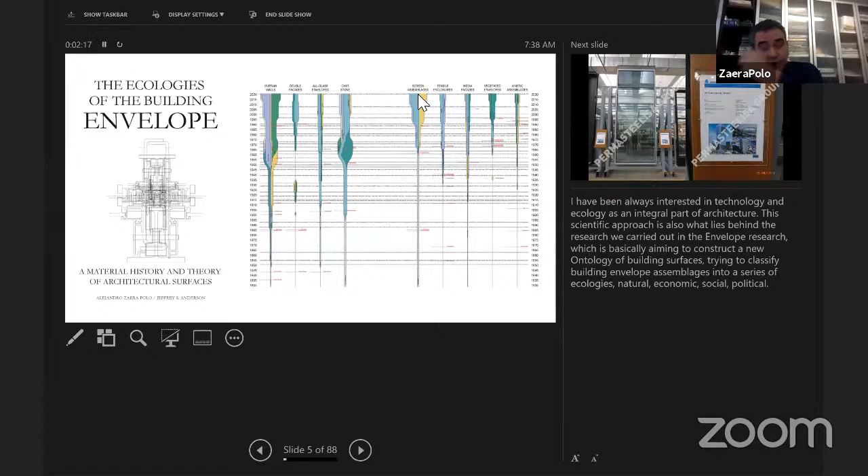My engagement with technologies runs also deep, related to one of the moments Carlo cited, the Venice Biennale in 2014, the origin of a project on the envelope, about to be published by Actar. The core of the project was the realization that the elements, the technologies in buildings, are much more interesting than the buildings themselves. We suspected, it was a kind of epiphany, that the issues dealt with at the scale of the detail of the technology are much more significant than the issues we normally deal with when practicing architecture.

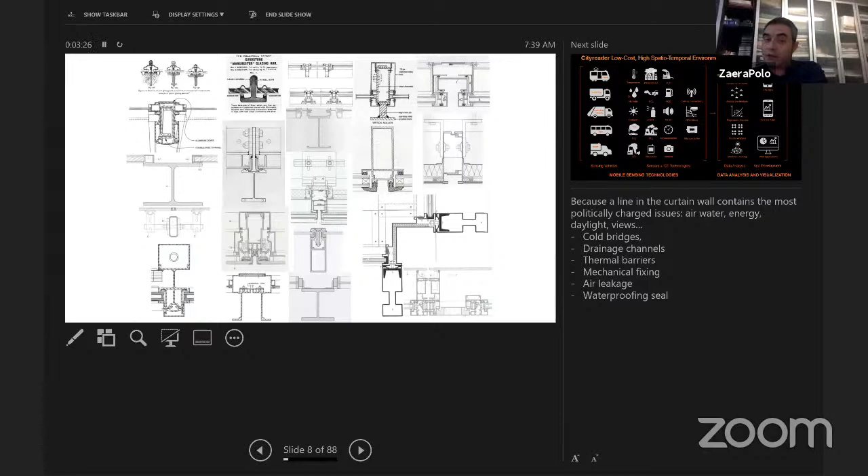This is the way we used to draw facades. Mullions are double lines running down a facade that explain a certain composition, rhythm, language, etc. But actually, within these two lines, there is a whole world of cold bridges, drainage channels, thermal barriers, mechanical fixings, air leakage, and waterproofing seals, dealing with the most politically charged issues: air, water, energy, and biomass, which is maybe the technology we are going to be dealing with. Urban environments are politicizing those natural elements, dealt with by these assemblages of materials that compose architecture. So it was a focus on these hidden technologies of architecture.

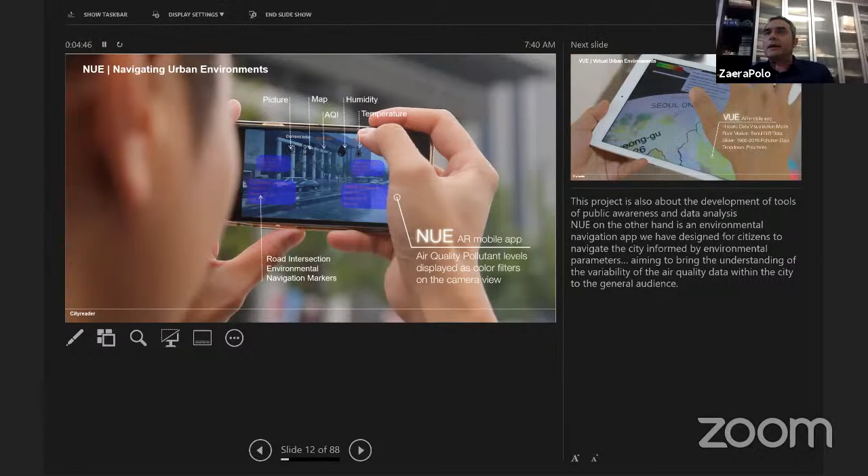This interest in technology and science has been substantially enhanced by my partner, Maider Llaguno, who is an architect but also a scientist specializing in urban environments, and has been crucial in radicalizing our practice toward a technological edge. One of the things she has been doing is developing mobile sensing technologies to acquire urban microclimate data at high spatiotemporal resolution through kits mounted on vehicles, producing images of the urban environment. We are also starting to deal with how, through AR devices, to make that data available to a wider public.

Some of these were displayed or tested for the first time at the Seoul Biennale in 2017. But let me go to the core of the presentation, which is this concern with green infrastructure in cities. Let me go back to a place where many of our concerns emerge from, the city of Shenzhen, where we entered a competition in 2013 aimed at proposing ideas for the development of a very large new downtown, now well underway, the Super Headquarters Base. Into this we proposed the idea of an eroded urbanism that came very much from some of Maider's concerns with air, flows, and environment.

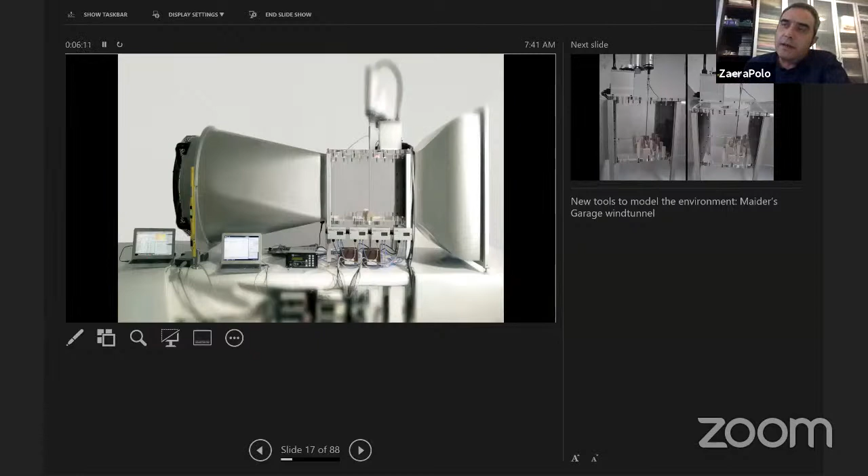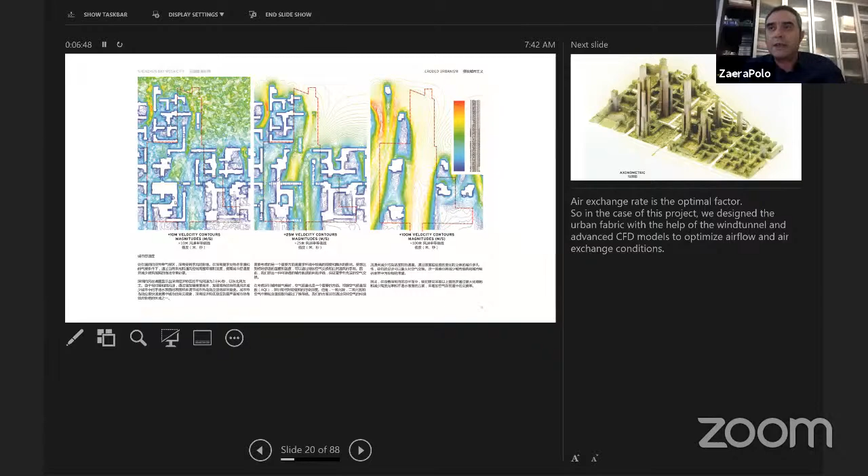So we envisioned the project as a kind of eroded fabric, which we modeled using a tool she has constructed, joining a wind tunnel with a robot that allows us to do tests and assess volume and shape parameters of urban fabrics, in order to understand how urban fabrics behave as generators of urban microclimates. Through this tool and some CFD modeling tools, we produced this eroded fabric for the Super Headquarters.

This was a very important moment in the development of all these ideas about green infrastructure, because it started to produce this image of a ruin, a city eaten by vegetation. The vegetation was aimed to produce certain microclimatic effects on the city, but the erosion, the conflict between solids and flows in the city, together with this added layer of biomass, became a kind of dystopian image of a city. It didn't win the competition, but it was important in triggering a whole research into this convergence, or marriage, between vegetation and urban structures.

Alongside these explorations, we also explored other ideas of urban mobility, electromobility. It's interesting to see these images back. They were done in 2013, and there were lots of people with masks. For some reason, we were also concerned with air.

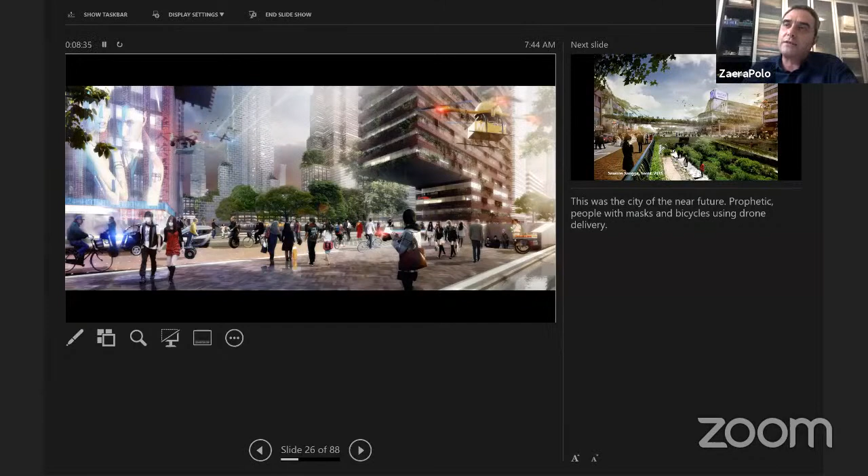We were concerned with a kind of micromobility as the future of the city, drones delivering food, things that we are slowly becoming part of, and that we think are what we call the city of the near future. We are not interested in visionary futures, we are interested in the near future, and to some degree it is already happening. These are some other explorations of similar themes that we did through other unsuccessful competitions, but nevertheless important in constructing a whole narrative and a whole set of tools to deal with these projects.

This was also in Seoul. It was the redevelopment of the Sewoon Sangga. You see the same people with masks walking around. This is Sewoon Sangga, you may have seen this before. It's a megastructure built by Kim Swoo-geun in the 1960s that we proposed to turn into a kind of artificial sierra linking Namsan Mountain with Jongmyo in central Seoul.

So two major urban green spaces linked by this line of buildings turned into a sierra, which would obviously create certain effects. It would absorb water, it would evapotranspirate, it would absorb particles, and it would obviously produce oxygen and absorb carbon. So these undeniable positive effects that the integration of green into infrastructure was part of this investigation.

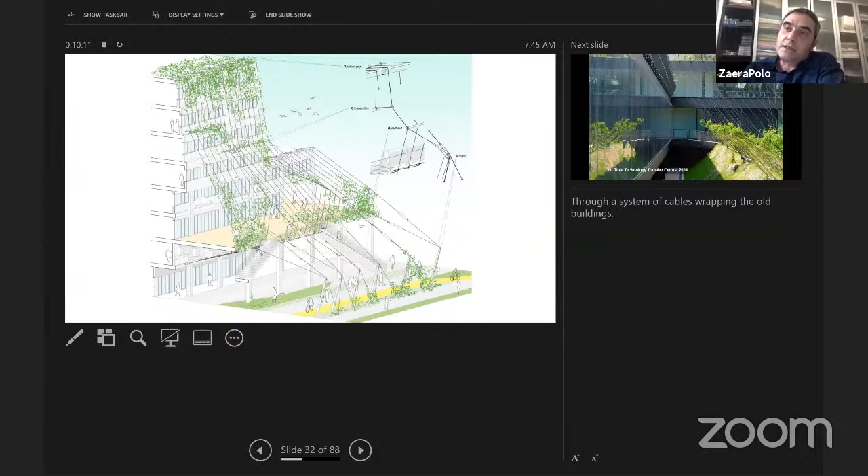This was designed by a system of cables that made the substructure proposed for this green sierra, which was a kind of upscaling of a project that we did in Spain in La Rioja, which was basically a building covered by a vineyard. You may know that La Rioja is a major wine producing region in Spain.

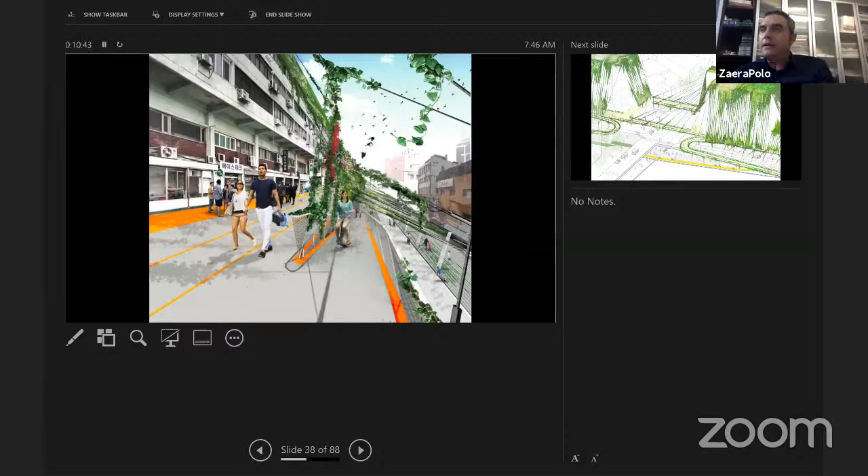So in this case, the cables were making a structure that would allow plants to grow around the building, and the same thing was basically reused or redeployed in Seoul to make this artificial sierra, in which the cables were actually not only acting as the substructure to the growth of plants, but also in order to hang bridges and run public spaces along this infrastructure.

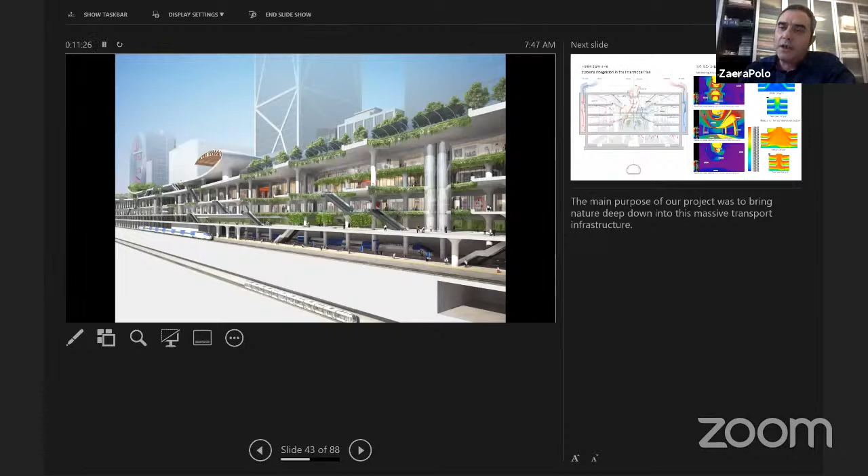The other project was a proposal for the Gangnam Intermodal Station in Seoul in 2017, where the greening of the infrastructure was actually happening underground. So there was a major new transport facility being planned, and in some ways our project was about bringing daylight and air, fresh air, and also greenery very deep down into the transport infrastructure.

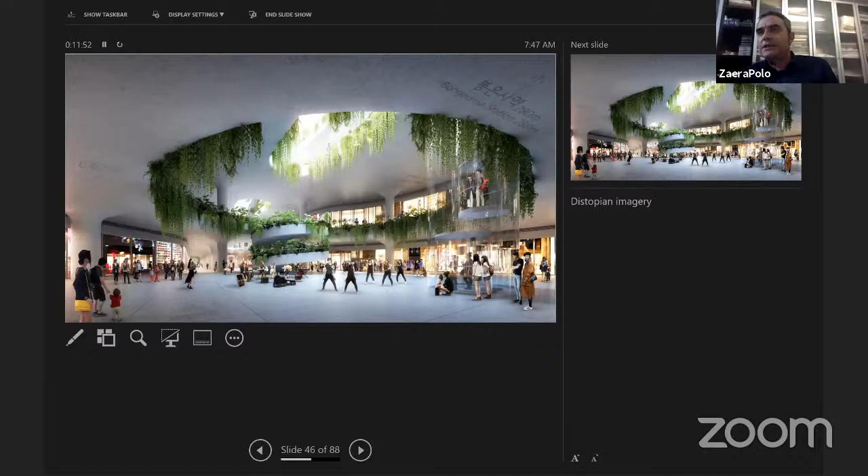And obviously many of the tools that we have been developing in order to analyze those environments became very important in making sure that these spaces were designed to provide these natural qualities, to bring these natural qualities into the underground of the city.

So again, the whole dystopian world of the city covered with green is very much part of this aesthetic, but also ecological perspective that we are trying to develop on architecture, and that recycles some of our earlier work in which we had been making projects that already integrated, were reliant on the integration of green biomass into the architecture itself, that now has become—this is one of the latest experiments.

It's a small villa in the south of Spain, shaped with balloons, but where actually the idea is that the surface is supposed to become literally part of the surrounding nature, and so this kind of aggressive biological exploration is very much part of the world that we are involved in doing now.

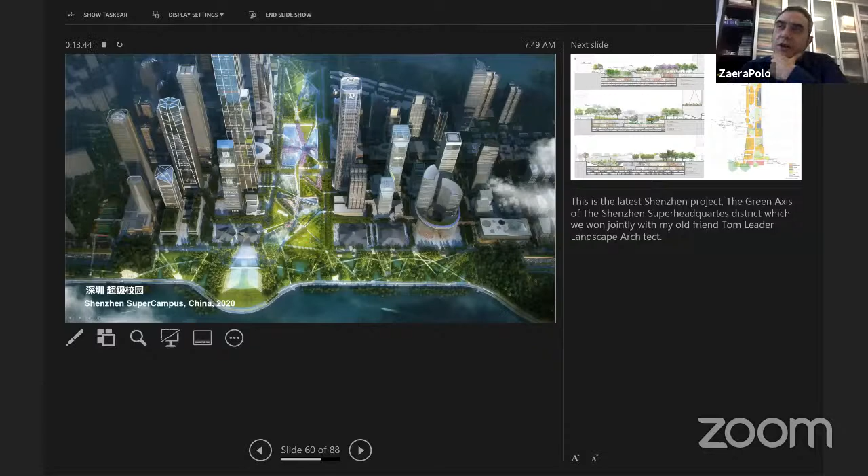And the final iteration of this, or the most recent iteration of these explorations, has led us to win—in a kind of interesting paradox or parabola that starts in Shenzhen in the super headquarters campus in 2013 and ends up by a project that we have done with Tom Leader Landscape Architects.

Jointly for the green infrastructure of this part of the city, which we are now starting to develop. The project is, like many of these projects, covering very large infrastructure, transport infrastructure system, but also retail project, and is very much based on the idea of turning that green axis, that park, into a campus that will be able to bring together all the companies that are going to be locating themselves in that enclave, in the super headquarters—but not only bring the companies together, but also bring citizens, egrets and butterflies and trees and all kinds of climatic devices that will turn this into a sophisticated environment.

And so it's a kind of three-dimensional campus. It's not a flat campus like the models that we were looking at in Harvard and Princeton and other places, but is obviously a campus where the ground deforms in order to give access to elevated walkways and underground systems.

A very important part of the development of the design had to do with the creation of canopies that will shade the public spaces from the very strong sun in Shenzhen, both through natural canopies, trees, but also artificial canopies that we modeled using CFD models in order to locate the masses of trees and canopies, so that the wind flows already running north-south between the bay and the Shenzhen mountains are enhanced, while producing shading canopies for the park. Those that are artificial also incorporate ventilators, fans that will renew the air when necessary.

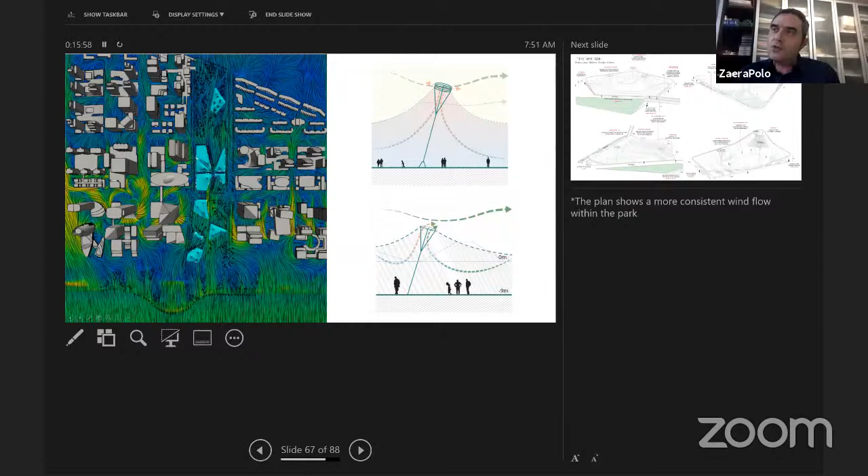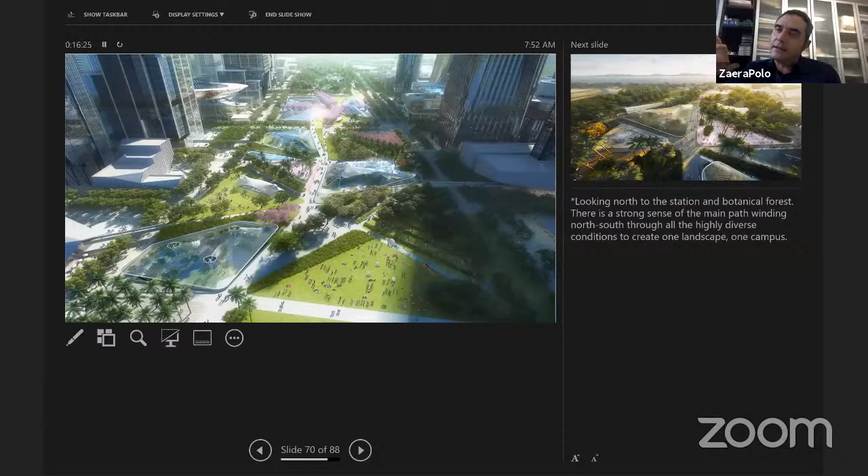These are some examples of the sunken plazas that we are proposing to build, where the park falls down into the retail facilities. This is the way these sunken plazas bring lighting and air and vegetation down to the retail level, alternating artificial canopies with natural canopies. You can see the fans that will potentially be activated. We are also planning to use the AC condensate of the underground infrastructure to produce a more sophisticated environment for the project.

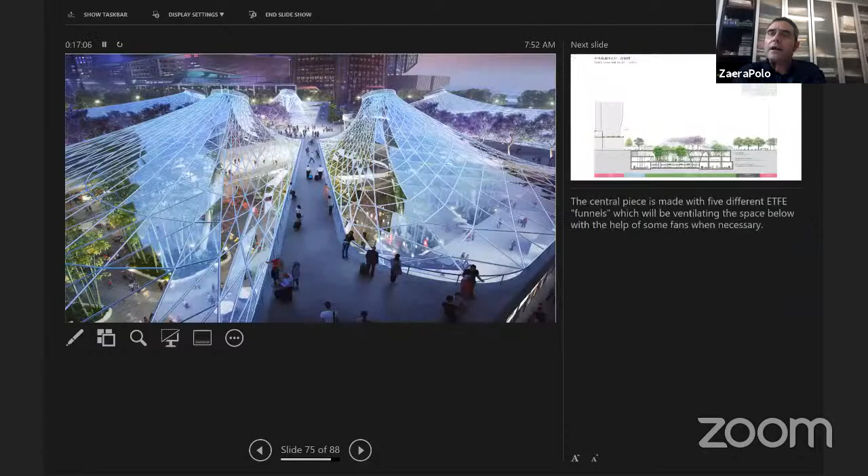One of the central pieces of this green infrastructure is the transport infrastructure underground, which we have designed with funnels that include a ventilator at the top, constantly ventilating the underground spaces. This is combined with a landscape project using trees as signage for the station, and incorporating other digital technologies into this merging with nature, as Carlo was mentioning before.

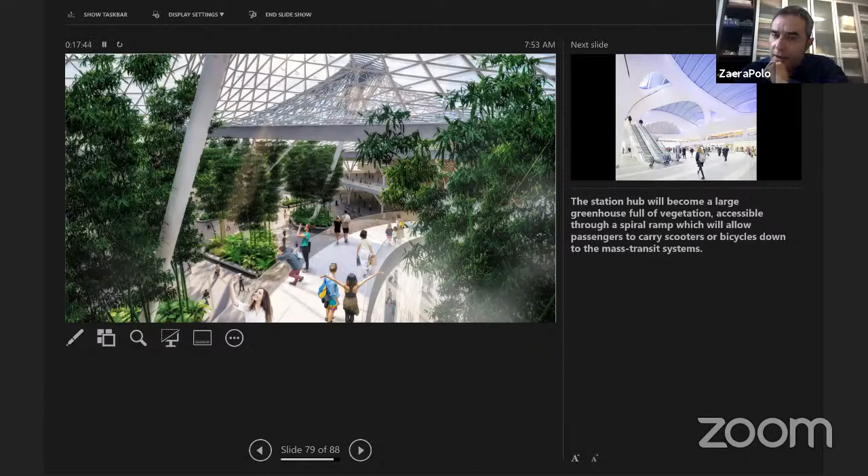This is the internal greenhouse station we have proposed, very different from other station atriums we've built recently in Birmingham, also covered with ETFE, but with an entirely different and much more interesting and exciting engagement with biomass, with vegetation, with greening—whose shape itself is going to operate as a kind of environmental regulator that ventilates this space.

I would like to finish with this image that our partners, who have also been looking at the ecology, proposed for the coastline of the park—what they call the egret lawn. This is also a coastal auditorium covered with a retractable canopy, where egrets and other birds, animals, butterflies, and all sorts of birds present in this ecology will come to populate the city of the near future.

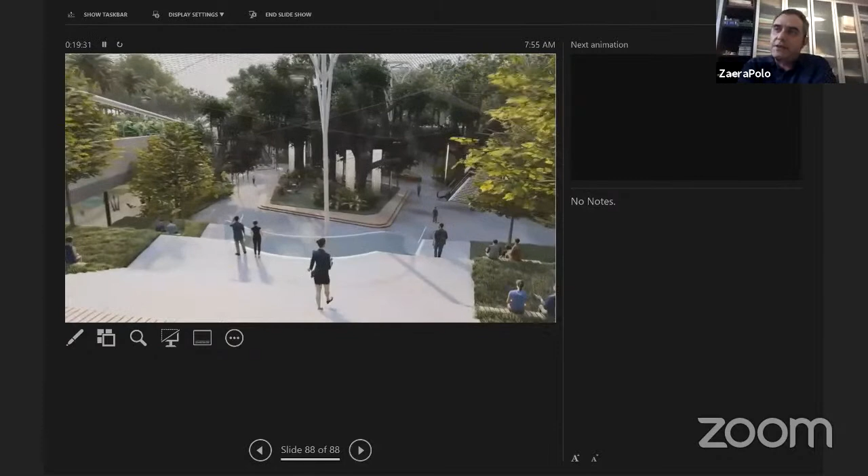I wanted to, though it's probably a little late, look at some of the videos we have produced. You see there the ventilators, giga fans mounted on tensile shading canopies covering these natural spaces, going down to the retail facilities under the park.

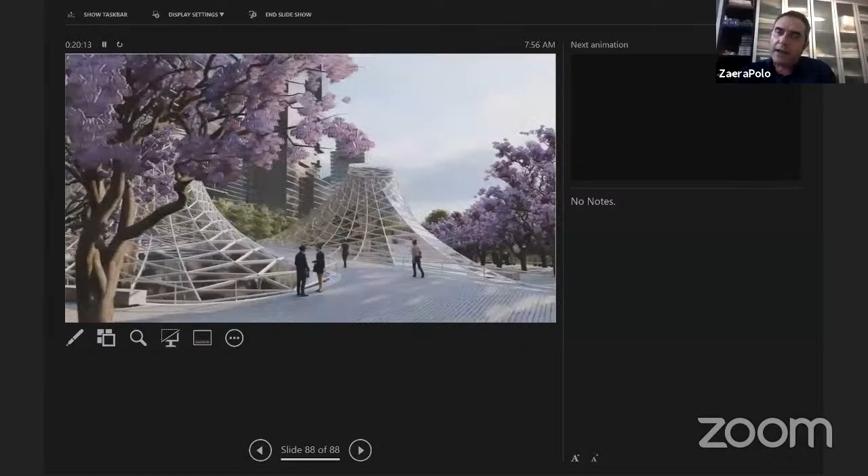So the idea is that the architecture here is primarily a way of reshaping and improving the urban microclimate by using water, ventilation, and plants embedded into the urban infrastructure. These are images of this future underground station, with panels extracting air from underground.

Maybe we can stop here. Thank you very much for your attention.

Thank you, Alejandro, for this wonderful idea of reconnecting our cities to nature. Although we didn't quite hear what you said with the animation, we did get the wonderful, enticing bird songs. We believe your words are as powerful as the bird songs. Thank you very much indeed.

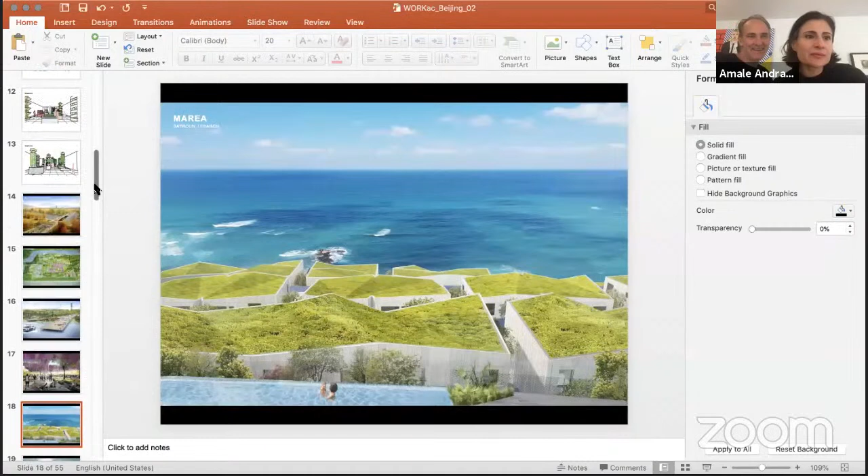Sorry, I don't know why it's frozen. To kind of bring, oops, sorry, I'm gonna skip that page. Proposing the idea of integrating indoor farming, hydroponics, aeroponics, etc., and inserting it in different cities around the world. These ideas also continued with... sorry, clearly having an issue here with the PPT. Do you think it's the video, Dan? No, I think it's these drawings. Okay, I'm gonna... past it. Yeah, I'm going to go past.

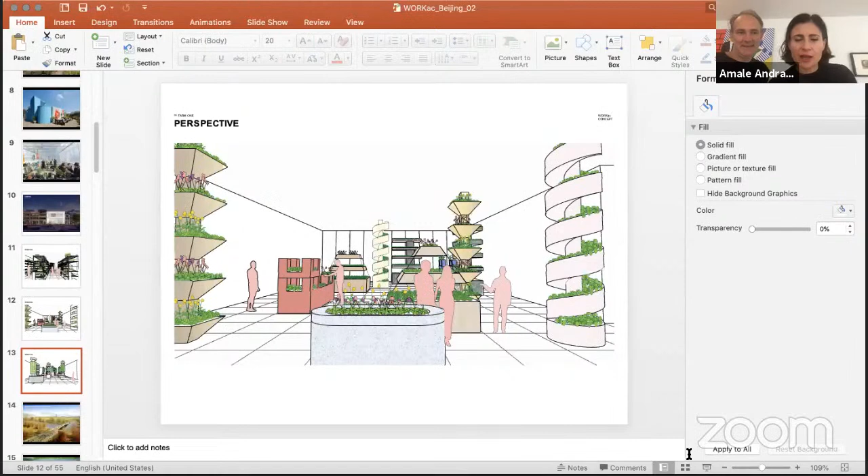These ideas continued with our Beijing Horticultural Expo Master Plan, again a collaboration, taking a very large scale urban setting and intersecting the urban grid and the rural grid to create new kinds of shared experiences, and a kind of integration between the urban, the rural, and the natural.

This collapse is something we're looking at now in Lebanon, where we're exploring the question of density—almost the collapse of greenscape, the mountains and the sea coming together through a series of 60 villas that create a topography that trickles down to the sea.

The section is incredibly compressed, creating both a very town-like experience while allowing a new intersection of the individual and the collective—a section that gives direct access to views of the sea in a very compressed way, as a means to preserve the rest of the coastline.

This idea of preservation is also something we see as enabling a more sustainable approach to cities. This is a project where we only kept the facade and created new apartment units behind it.

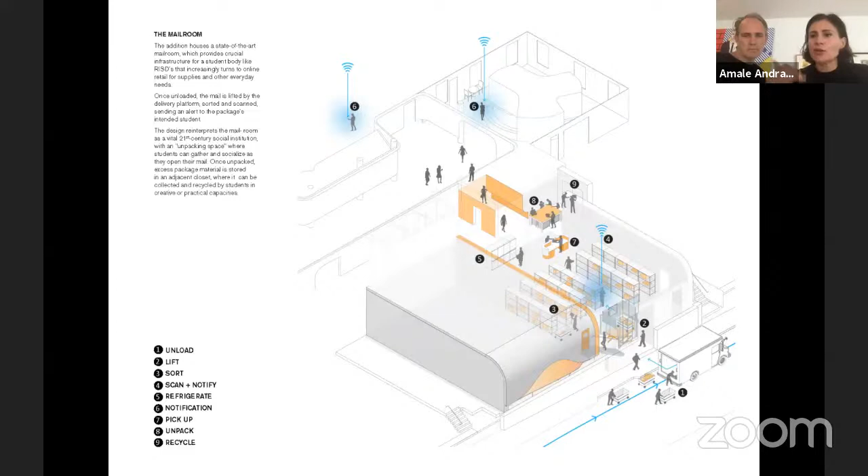And this is really just kind of appropriating the parking lot. Students are called from everywhere on campus to come pick up their package. The boxes are recycled because it's an art school. And so there's a whole system that gets created.

We took the notion of Alejandro's envelope in a different direction, looking at thickened envelopes where we could reinstate public space. In this instance, we were given 4 feet to cover a parking lot in Miami, and declared that that was the space for architecture, creating a vertical public promenade with a library, an art gallery, and a series of experiences. At night, the architecture disintegrates because of its materiality, and you start to read the parking garage behind.

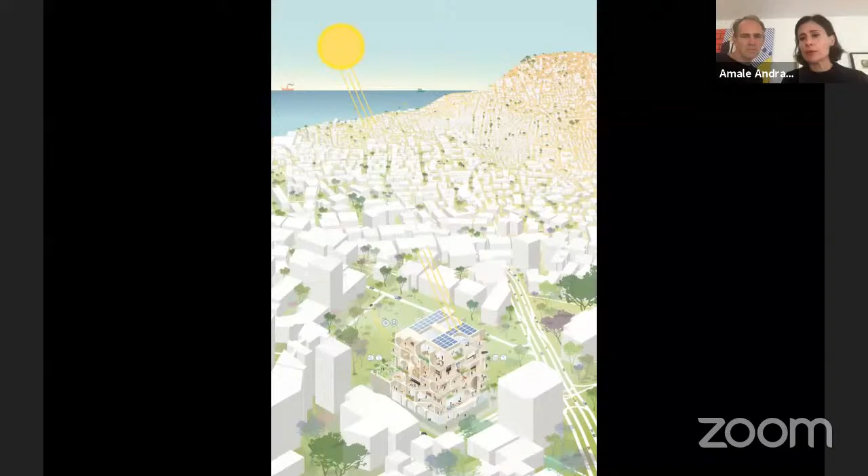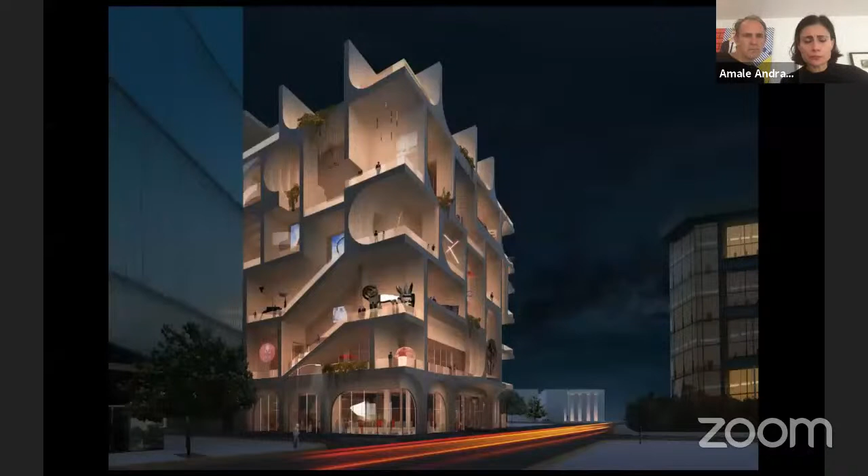This idea was pushed much further for our Beirut Art Museum, where we wanted to investigate the balcony as a device—an old device that was incredible in negotiating inside and outside, public and private—bringing an idea of vertical gardens into the sides of the buildings. This Inside Out Museum creates outdoor galleries, rooms that are gardens but also places for sculpture, negotiating inside and outside, bringing art to Beirut and integrating art and city life and greenery along the facade of the building, a kind of celebration of openness for the city.

A sense of creating environments, but with a slightly more whimsical approach to constructing nature that is more graphic, more two-dimensional, and more pop. This was our store for Anthropologie, where we literally allowed vines to grow around circles to indicate the artificiality but also the playfulness—again just through architecture, cutting holes in a very simple way to bring the outside in.

Some of these formal strategies were also explored in the Kew Gardens Hills Library, where a very simple, not so complex, almost flattening of the architecture allowed a certain compression to bring the green roof to the front and make it really part of the facade of the building—using architecture to bring the outside in from the north as well as from the south.

And then finally, the idea of systems, which we're very interested in—a house as a living machine, but reinventing that for today, where a house is a greenhouse, is collecting water, is mitigating temperature, but much less through HVAC, much more through architecture, I guess.

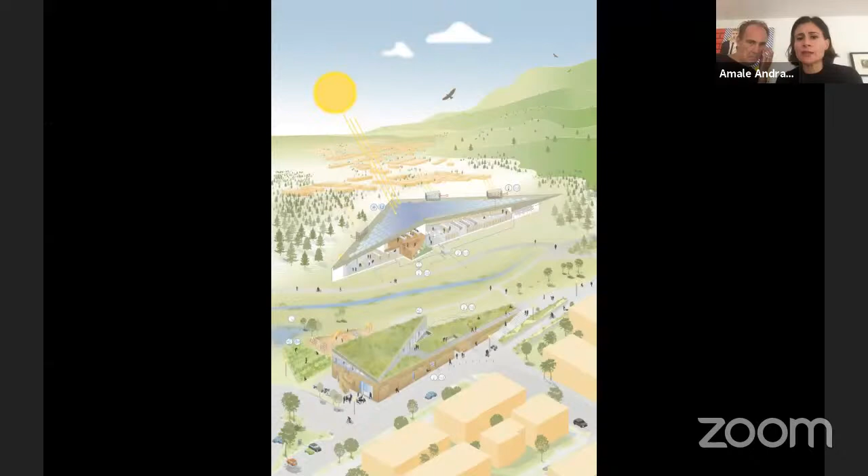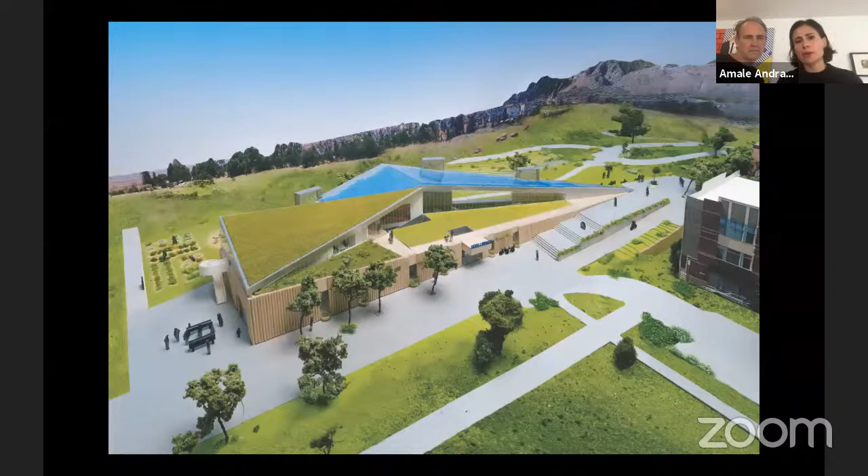Many of these ideas come together for the North Boulder Public Library, which we're currently also starting construction on soon—a net zero building where the air is circulating through chimneys, which are very much expressed in the architecture. We embrace the thickened envelope again in this project to negotiate, and we integrate a greenhouse, bringing all these ideas together to create a building that is very architectural but also echoes the surrounding mountains of Boulder.

And then finally, I think we were supposed to switch there somewhere. Oh, sorry, sorry—I'm very conscious of time.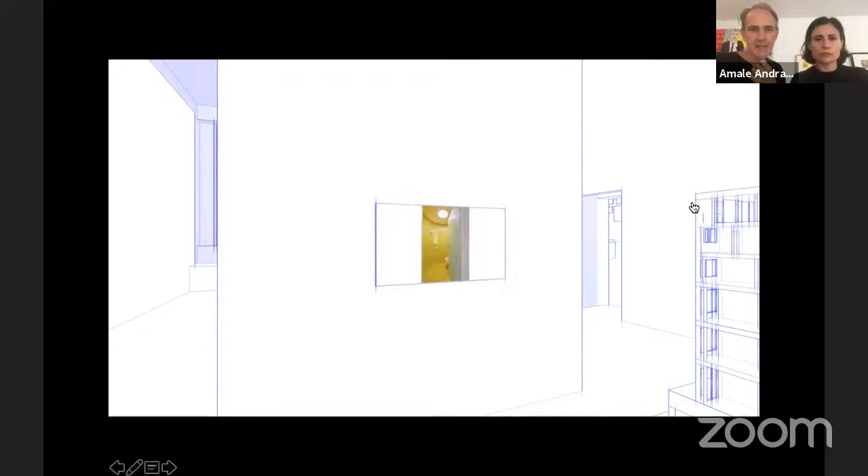I think it's hard to hear me over the music, judging from Alejandro's presentation, but if you hear me—it's an exhibition where we looked at our entire body of work through the lens of systems, specifically water systems. It goes from the scale of a sink to a shower, where we integrated plants into the shower so that steam from the shower feeds the plants, to larger sinks, to ideas about in-food structure, where water and plants combine to create food in the city—whether that's plants or fish, in this aquaponic system that merges plants and fish in a symbiotic relationship.

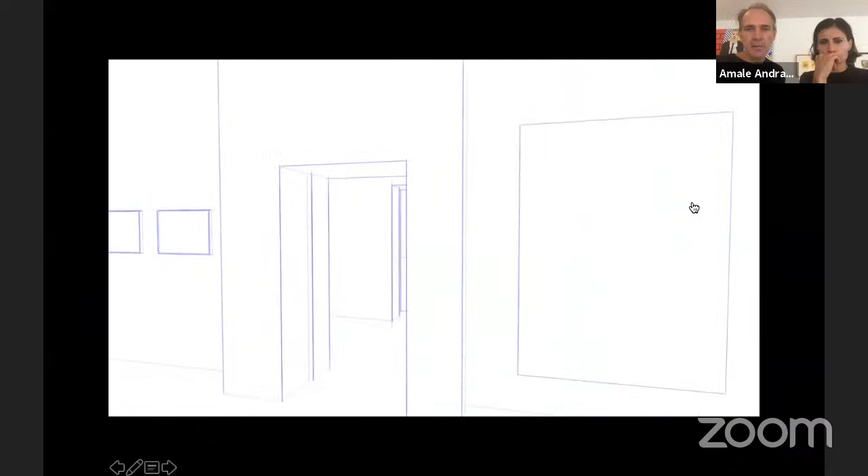To larger projects where the building itself is a kind of plumbing fixture that collects water and distributes it as a gray water system throughout, but also as a waterfall, or here in a proposal for the Guggenheim as a kind of water park, sliding down the ramps to experience the art. In this room, all projects where water is a challenge in drought-affected areas or deserts.

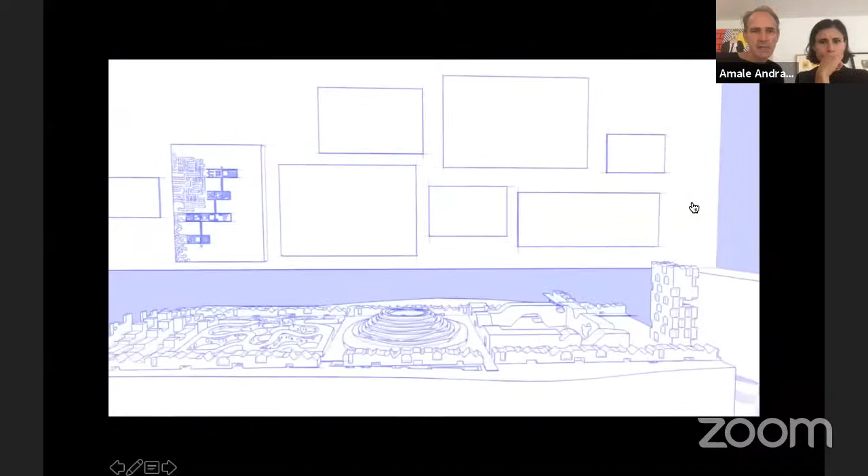And then looking at projects that are on the ocean that specifically have to do with the relationship between water and city at the moments where the two meet. And then a room about the future of cities and the future of the planet with larger projects, such as our proposal for a new city based on shared infrastructures called Nature City, that was presented at MoMA in 2014, to a view of water mining asteroids on the moon.

That's it. Yeah, we have an extra 2 minutes. Thank you so much, Amale. Thank you so much, Dan.

It's simply great, brilliant to see this refreshing ideas regarding building as a living entity, from the entirety of cities to the envelope to the systems inside buildings. And it's so refreshing and so healing to see this during the time when COVID is still around us. Thank you very much indeed.

Let's move on to the fourth speakers, Massimiliano Fuksas and Doriana Fuksas. They are Italian architects and founders of Studio Fuksas, with offices in Rome, Paris, Shenzhen, and Dubai. Over the past 40 years, Studio Fuksas has developed an innovative approach through a strikingly wide variety of projects, ranging from urban interventions to airports, from museums to cultural centers, and spaces for music, from convention centers to offices, from interiors to design collections. Ladies and gentlemen, Massimiliano and Doriana.

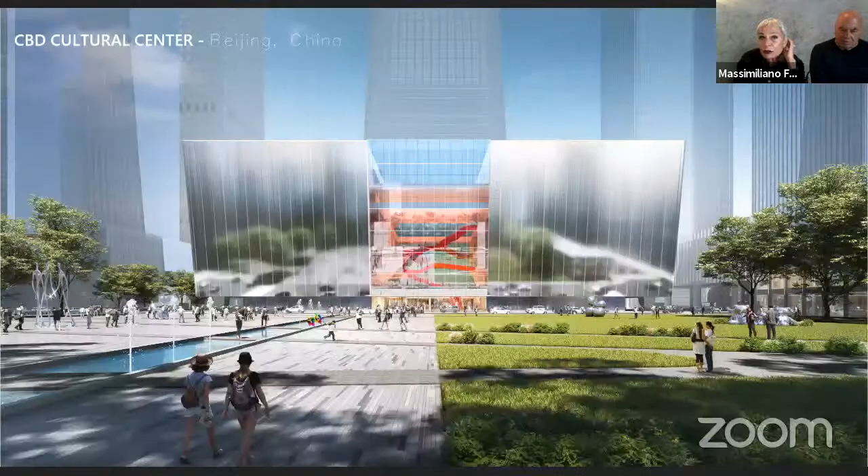The picture before, yeah, it's in front of a garden, and the idea was to integrate this not big building with what's in front, so it's a reflecting metal in a way that reflects the garden, the trees, the water in front of it. It's in two parts, connected by ramps and a staircase, red staircases.

And you can go, please. Go ahead, because we go faster. Okay. Go, you can just show it, because it's important. You can see only the images, that's enough. Okay, this is the interiors, the one before, please.

This one is again China. I would like to stay there again. I love China, it's the country with the most energy possible at the moment. It's the youngest country. And could we see the Shenzhen Airport, please, after this?

This is very important for us, a very important project, because as I was saying, China is important for us, and I love it, because this is like the model we did for the competition.

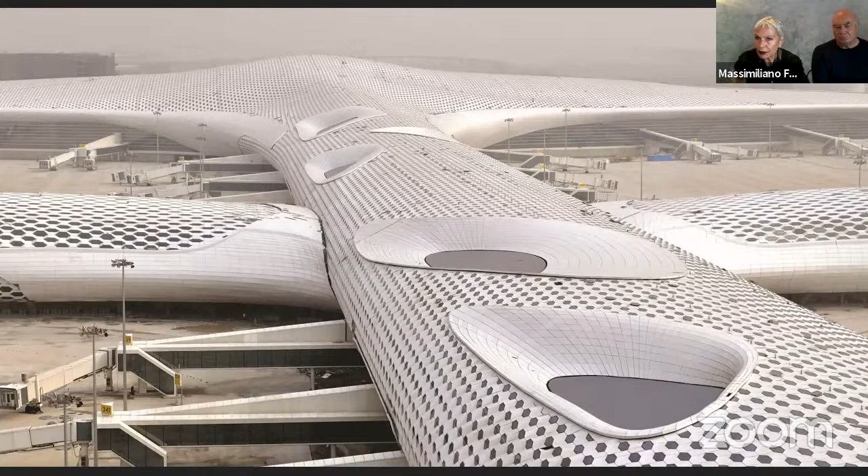Every piece is different from the other. It's done by hand. Could we go? Yeah, please go. Again. It's the same, and the outside is the same as the inside.

Okay, stop, the one before. Those sculptures inside are for conditioning. We always work with artists and light designers, with people who do other kinds of work, not alone, because we believe it's important to share ideas with other people. But this time it wasn't possible to have an artist, so we did the sculpture alone for conditioning.

And here you can see the depressions that are inside the airport. It's a landscape, in fact. Outside it represents the landscape, the small mountains that are in Shenzhen, in that same place.

We pass to another Chinese project, the Guosen Tower. This project is in Shenzhen. This is a tower, roughly 300 meters high. We started with something like a depression, but it's not a depression, it's only used to recycle the air conditioning three times. In this gap, you have all the possibility to reuse it.

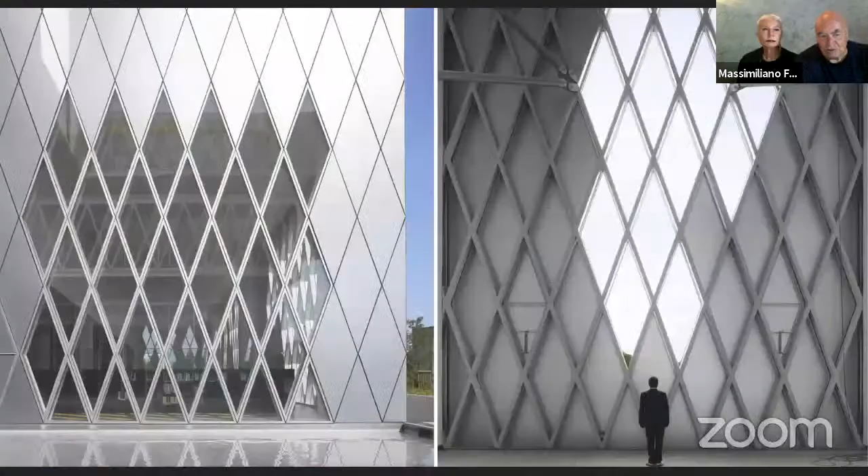And go on, please. Again. So you have artists, and the sculpture is always the most important part in our work. Again.

Next. This, in Tbilisi, is for civic services, during the day and the night. We did this for the government, the former President of the Republic in Tbilisi. This was 11 leaves that are kindly deposited on these buildings.

Go on. Next. These are the leaves. This is the bridge we did in the middle of the city. The whole building is not only outside where you can see a different emotion, you can see the emotion inside too, the leaves are really part of the building.

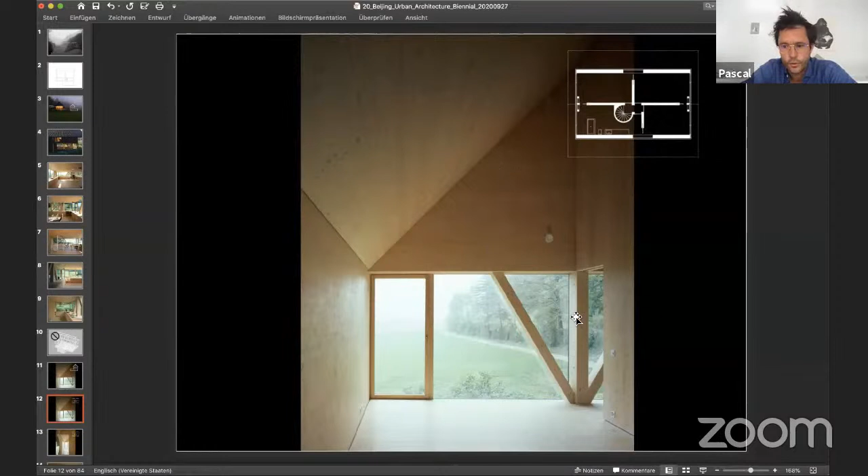Then in the upper floor, which is in the section up here, we have a plan that is almost organized like in a military way, a very strategic, simply cut of the plan into 4 equal pieces. The perception of the outside, as I said, is a vis-a-vis, like a painting, and you walk from one space to the other around or along the glass, like this.

Then the third space is below ground, where the surrounding is only a memory, not present at all anymore. So it looks outside.

The next building I would like to show you is about the very small and about the very large, and it filters out the middle scale. It's a building where you cannot perceive the building as objects anymore.

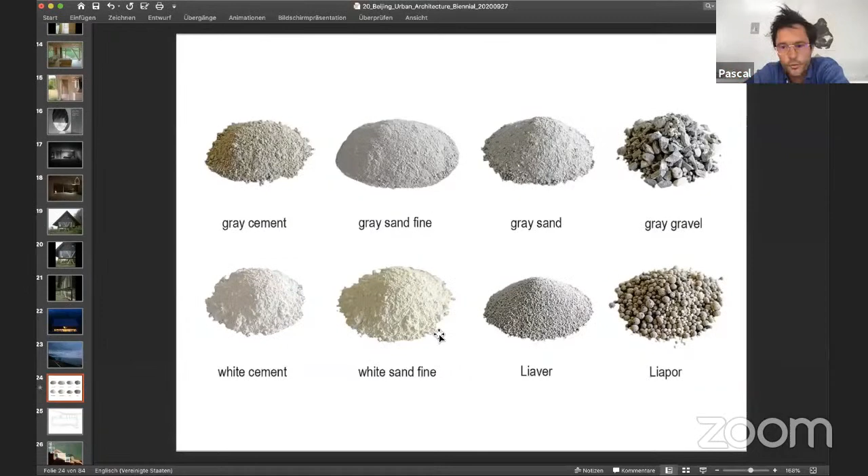There is another topic, which is the idea to take away indication of time, so all details in buildings that indicate time have been removed. As a consequence, it is built in insulation concrete, where insulation and concrete is in the same material, which produces floor plans without any layerings or indications of details.

In section, as you see here, the building is on a slope. You either perceive the sky and the sea, or since it's on the slope, you're so close to the building that you actually only perceive the very proximity of the building, almost like the handcraft, the way it's done.

Also, the way the building is done is almost like in a Roman method. It means there are no strong coffrage to hold the concrete, so it will have very expressive traces of how the building has been done.

You approach the building through the roof and go down these little stairs, enter a little garden, and from here come to a main space that itself is divided into two spaces: a spring room with 4 central windows, and a summer room that has no windows. The bedroom is hidden by the fact that the stairs start 5 steps earlier, and you cannot see any connection downstairs to the sleeping room.

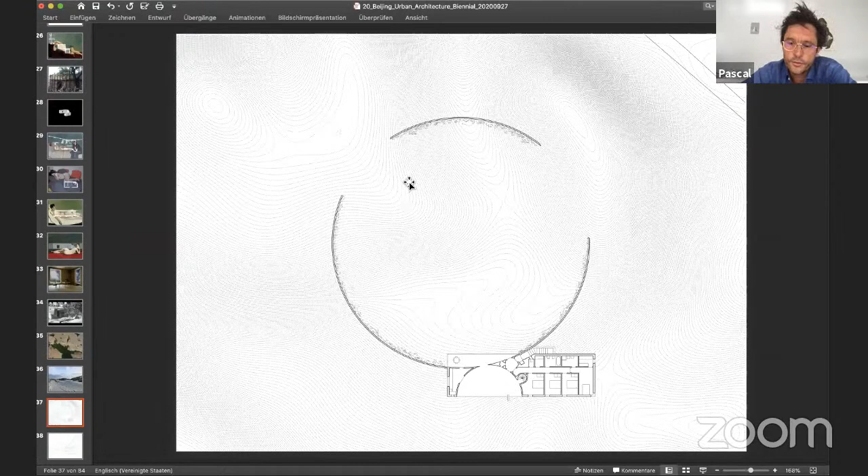There are 2 main spaces: one is the space on rocks, accentuated by this one wall that produces the rock wall, and the other is the sea space, which is a very abstract space facing the abstract of an infinite sea. This is how the floor plan looks, and how this building looks.

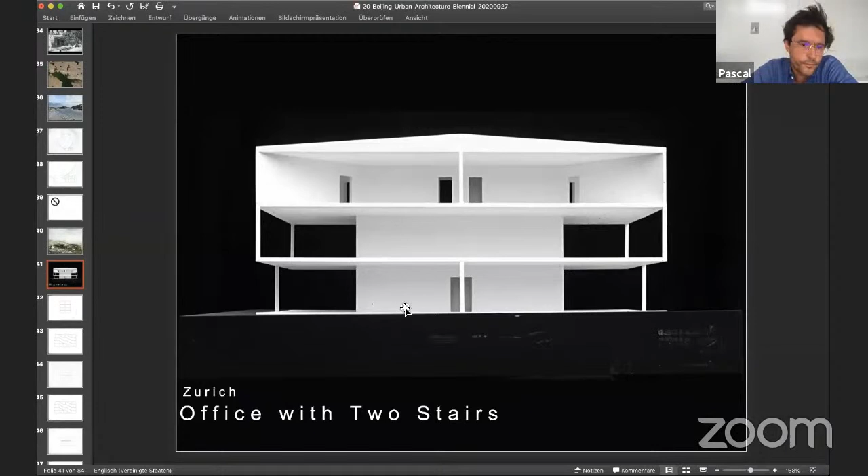A next project I would like to show you is actually a student project that I made. It's a 3-floor building, all out of concrete, 3 floors above ground, with stairs in the middle, 2 stairs actually placed on top of each other, producing the following spaces.

On the ground floor, the pillars are in the middle, which produces a 60 by 60, 50 by 50 grid of Mies, a very open connection to the outside. That's also the place you can take up the stairs here or here and enter this first upper floor.

If you take the stairs to the very top, you end up in this kind of floor plan where again the perception of space is defined by a wall and a very clear direction. If you place all 3 floor plans on top of each other, you realize they're 3 very different ways to perceive space.

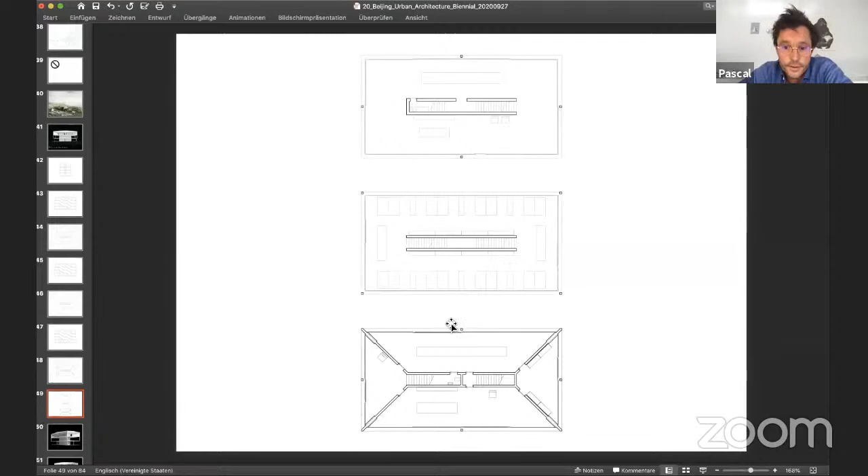Structurally, I find it interesting that space and structure are very much correlated. So structurally we have the core, we have 4 cantilevers. These cantilevers hold this roof plate, and in order that it doesn't bend through, it's fatter in the middle.

The lower plate is held up by this cantilever and the other one. In order that it doesn't bend through, it's actually pulled up by a traction cable. And the plates in the corners, in order that they don't fall down, are pulled up by a cable. The only pillars really on compression are the pillars in the middle.

This produces a building that is, on one hand, a very simple building. At the same time, I think it produces various misleading readings of the building. It could look almost like a Greek tripartition building, or it could look like a Maison Domino with pillars and plates, but it ends up being none of them.

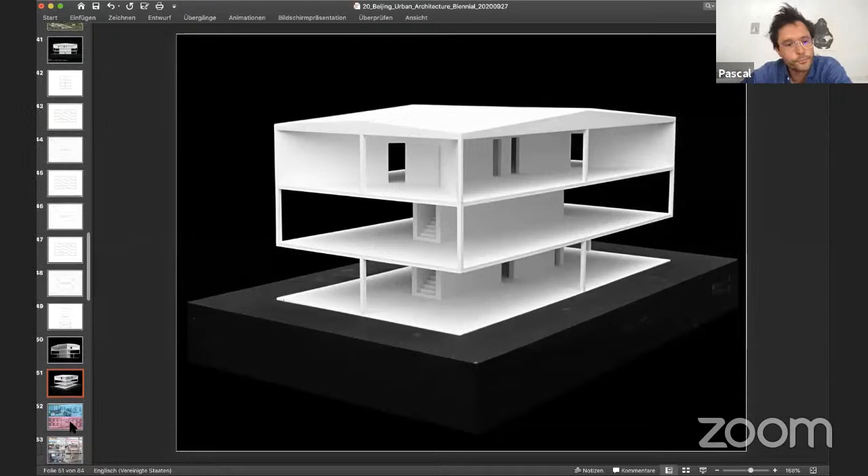The last project I want to show you is a rethinking of how to use steel in social or in housing, and some thoughts on working and living at the same place.

In this project, there are several new typologies to bring people together in a new way, and there are two strategies.

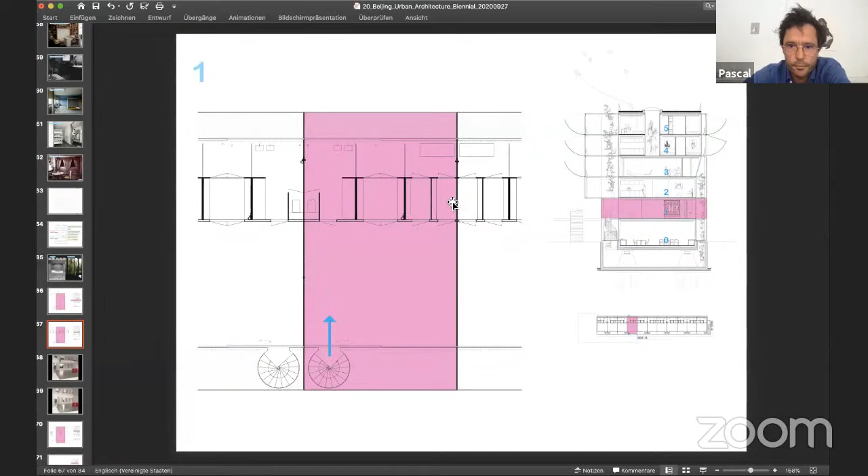This produces on the ground floor these kinds of empty spaces that can be working or living. And here on the upper floor, this floor plan where the bedrooms are minimized and placed at the center, which produces the possibility to open and close these shutters and make it one large room, or close them down and use them as bedrooms.

This is the typology for elderly people. The idea is that each one has their own bedroom, but they can open their doors and suddenly have a larger communal space.

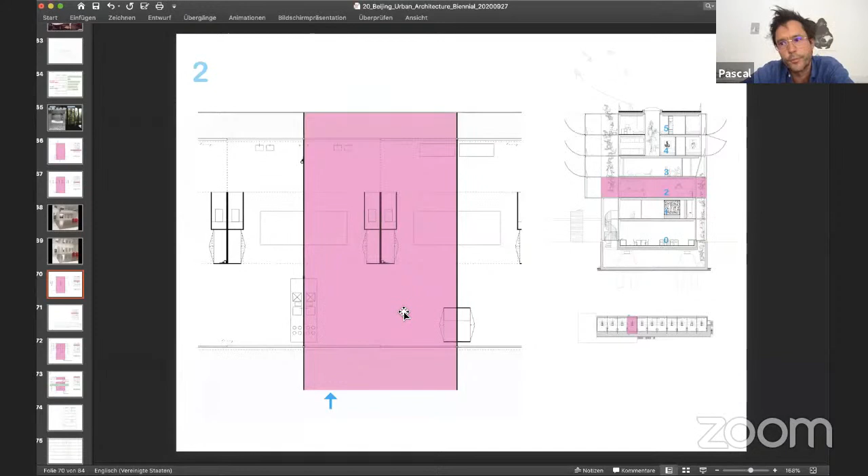That building also has a very large communal area.

Then we have apartments with 6 bedrooms in 45 square meters, basically by reducing the bedrooms to just the beds, and then using the community to have a bigger communal space, or to produce very small apartments.

That's a construction section, again with the idea to use the in-between climate as meeting rooms. It's built out of steel, which is according, at least to Swiss regulation, good for engineering, but also for fire issues and sound issues.

It has slabs every 7 meters, and that's the construction detail of that building. It has metallic walls that have a thickness of 2 centimeters that can be placed very efficiently on top of each other, and then simply this wood or floor pieces can be hung in.

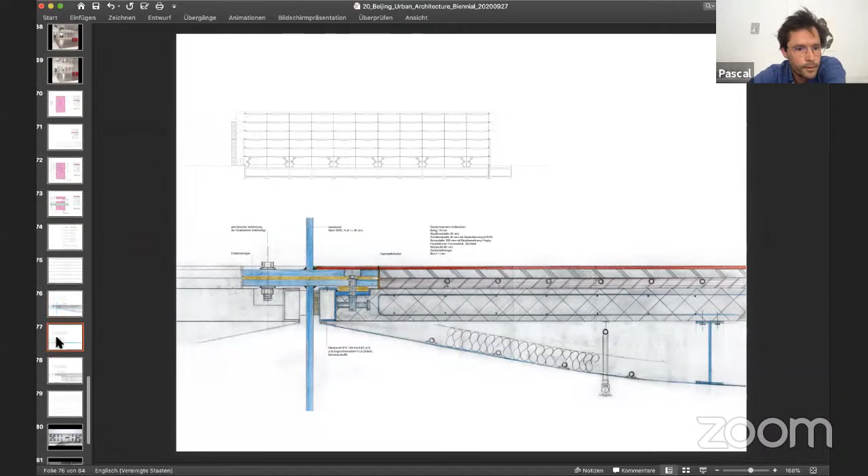It looks like a building out of paper, and it will more or less look like that. That's it. Thank you.

Thank you, Pascal, for this brilliant presentation. It reminds us that the future might not be a break, but a continuation of the poetics and anthropomorphism that has made architecture so great. Thank you very much indeed.

I think what Pascal ended with is very much the kinds of answers I think my provocation might suggest, perhaps. So I'm picking up on this issue of flux, the notion of movement of people and change, and I encompass in this what I would call slow flux and very quick flux.

On this temporal scale, one can look at even climate change as slow flux. There are demographic shifts which happen on account of climate change or conflict, which are somewhere in between. And of course, very quick flux is natural disasters. I think this is something that's going to have to characterize our imagination of what the urban might be.

This movement of people has been historic, and the extent of it increases with time. Sometimes it is in a context of conflict or resistance; sometimes it's with much more porosity. So I'm going to pick up on some of my research in India and share that with you.

The question, again, in the context of flux, is what really is even the urban when we talk about India? India becomes relevant just because of the scale. It's beginning to position for us, in our discussions as a profession, an extreme condition, because it's 1.2 billion people in limited land. And what does this mean?

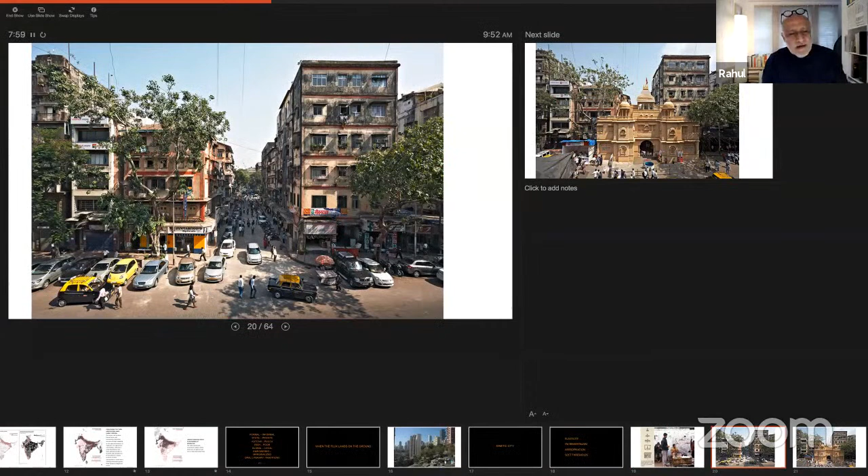Or the way these great maidans or open spaces in Mumbai are used - this is cricket, this wonderful Indian game that was invented by the British. And these are sacred spaces in the city. In the evenings, weddings wrap around it, and you see the cricket pitch no one touches, because that is really the sacred spot.

The wedding appears from 7 o'clock in the evening to midnight or later, and disappears in the morning for the game of cricket. Here, architecture is not even the spectacle of the city, but I think the static and the kinetic city, in a sense, coexist in synergy. This festival mobilizes 5 million people on an annual basis.

And when the 300 such large idols are immersed in the sea, the memory of the city dissolves. It melts away in the water because these are clay idols. So there's no method to encode the memory of the city here.

It's an enacted process, and so this is quite opposite from the notion of architecture as the central spectacle of the city. I was fascinated by Alejandro Zaera-Polo's presentation, where he talked about the skin and how little architects actually have to do with it.

This I call the landscape of impatient capital, because capital is the only thing that drives this so compulsively. Architects get reduced to form givers. Vendors take over the decisions in terms of technology, which we are way behind on, honestly. So what does this mean in terms of coexistence, where even the smallest actors can coexist with the most powerful players? I think that becomes an important provocation.

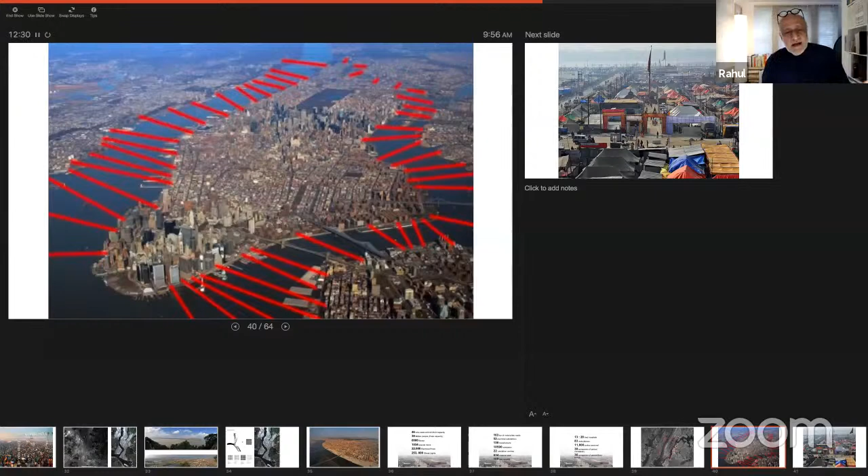Of course, I'm going to share two things very quickly—this is a lecture in itself. One is that the entire city is built out of 5 building materials. It's a kit of parts—that's everything above the ground. So it's deployable, constructible, deconstructible, and it's actually the logic which is replicable. It's not about being unique; it's a very simple logic, but it produces very unique forms in terms of scale, just using those 5 materials.

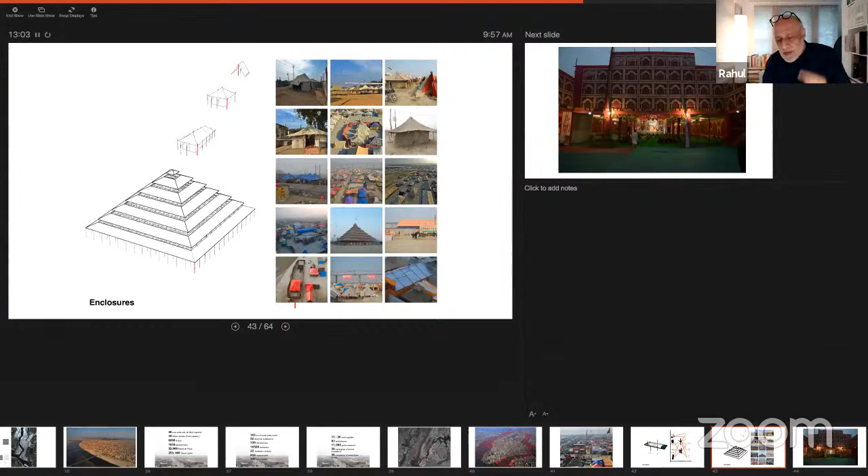That red stick you see is 8-foot-tall bamboo, which is the basic module, which ramps up into large temples, into large megastructures, into community halls, which are then clad with fabric, producing all sorts of spectacular architecture. The second thing I want to touch on is the governance system, because here the point I'm making is: what are the precedents we could look at if we want to deal with flux?

I've taken the architectural components as one, and the other is governance, which is more abstract. We call it policy, or other forms of instrumentalizing governance. This drawing shows all the governance things that kind of happen.

What's most important is governance here is on a temporal scale, meaning the power structure changes over the year as they plan for the city. Most of our cities today, our governance systems are actually more archaic than our buildings, and we don't recognize this. That's why we are not prepared for flux, because flux requires a completely different imagination, even in terms of governance structure.

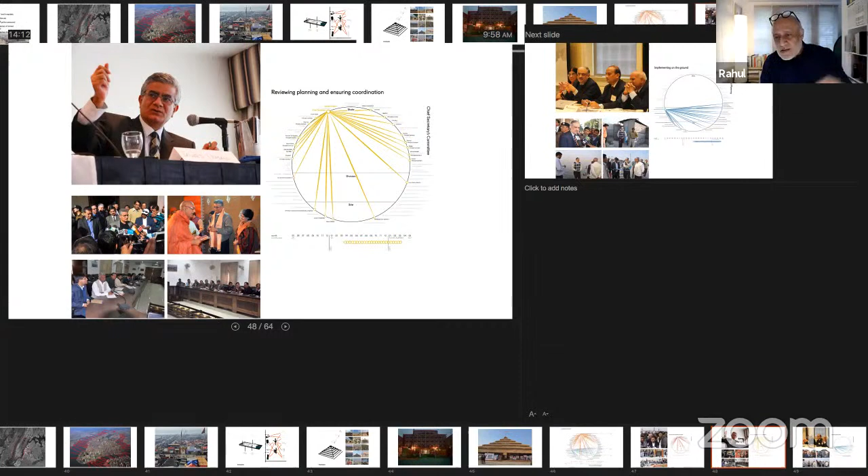It starts at the beginning of the year with the chief minister and the top politicians, then moves to the bureaucrats who become in charge. Only one person reports to the politicians. During implementation, the whole hierarchy shifts to the bottom of the circle. During the festival days, the commissioner can go outside the circle to get subcontractors, and by the end, he is the man in charge, reporting only to one or two people. So it's very nimble, not bureaucratic.

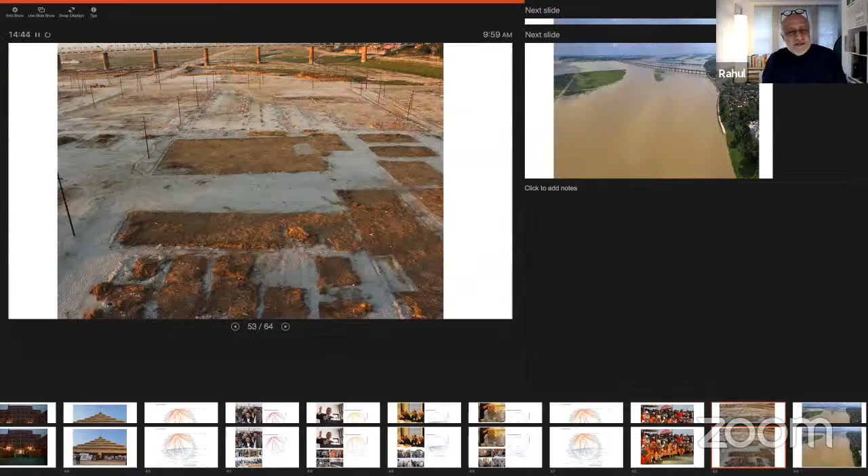At the end of the festival, when they offer gratefulness to the Mother Ganges, within a week the city disappears, leaving only these mats. Then in June the monsoon arrives and every memory of the city is removed. It's just an imagination—ephemeral, but formal, intentional, and deliberate.

We have to detach the images of the informal from what's formal. If I showed you images of the city, you'd say it's an informal city because of the temporary materials. But I would confidently say that in the context of India—besides Chandigarh perhaps, and maybe 10 other cities like Jaipur—this is perhaps the most incredible example of a formal, intentional, and deliberate deployment of resources to make an urban system. That's what's remarkable about it.

Is this a one-off? At the behest of my friend here on the screen, Alejandro Aravena, we expanded this for his Biennale, where we asked in the center of the Biennale: does permanence matter? That was a provocation for architects—is ephemeral a serious category to look at? So for the Biennale we expanded this categorization and created a whole taxonomy of looking at ephemeral conditions for transaction, refuge, religion, etc.

I want to end with how one is extending this. I'm currently working on the question of sanity and equity through sanitation infrastructure, and this is a very interesting map we made. We took 10 diseases—here you're seeing 5. We took cholera, water shortage, child nutrition, malaria, etc., and we mapped it.

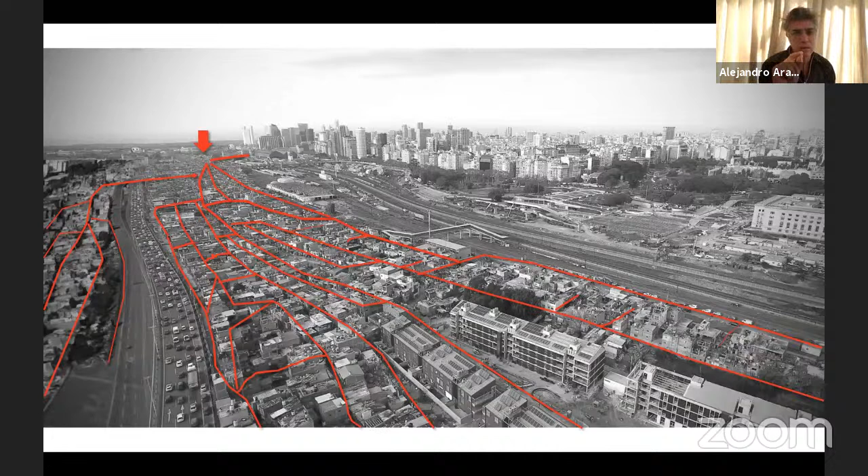So in a very bold move, the Inter-American Development Bank said, what if we build our main building in the slum? The particularity of this slum is that all those 50,000 people go in and out through one single bottleneck, one single entry point close to the train station. People have to walk for 1 hour, they cannot even afford public transportation. They walk on average 1 hour to the jobs offered by the formal city. Actually, the formal city workforce comes from here, exactly what Rahul was showing in his presentation. Within that hour, you can imagine the amount of anger and resentment that accumulates while dealing with the opportunities the city concentrates.

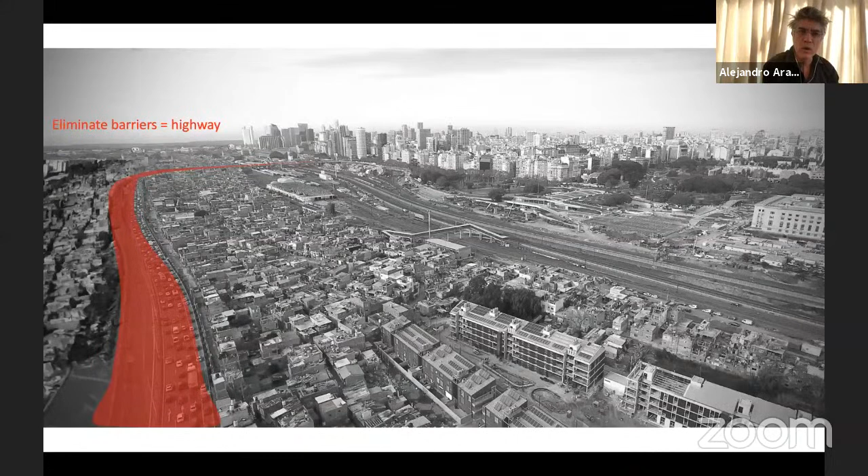In the World Bank and IDB improvement and upgrading of the slum, one of the main goals is to eliminate the highway. It will be left there as a kind of elevated public space, being discussed as a resource, and will be transferred somewhere else. But if the problem was eliminating barriers, we thought the most important one was the river of trains, as the city calls it, that prevents people from directly walking from the slum to the formal city. Actually, there's no connection, and there's this huge barrier.

So, trying to improve the development of the slum, the IDB asked, what if we place our own headquarters inside the slum? That is already a very unusual, unexpected, counterintuitive move, particularly for a bank based in Washington.

But the president of the bank said, it's true that we are a bank, but we are a development bank. So while building our own headquarters, shouldn't we measure and test the amount of development this project may be able to trigger if we follow the same criteria we use for financing other projects of infrastructure, sanitation, highways, energy, or whatever it is. So let's submit our own building to the same procedure we use for financing other projects.

And after studying that, our conclusion, if the expectation was to trigger development, was to our sadness that we recommended not to do the building in the slum, because it would have been maybe a powerful message, or for PR reasons, maybe good. But in practice, when we were measuring, there was no development being triggered, except for the possible white elephant in the future that may have remained a symbol of good intentions, but not triggering in reality the expected development.

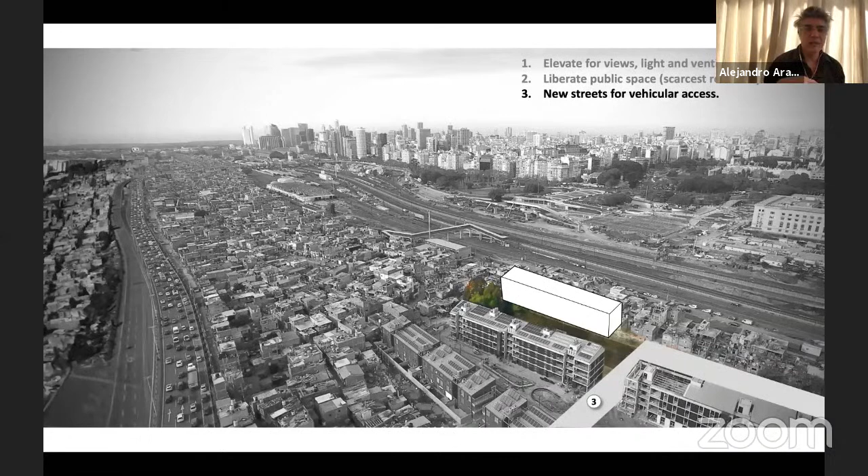But in addition, your workers, how do they come in and go out at work? What about at night, security issues? So at least a direct pedestrian connection should be made to the formal city, to public transportation, and so on. The problem was the city had neither the money nor the jurisdiction to operate there.

So we said, don't do the building unless—and this was the tipping point in the project—what if, instead of the building asking for four conditions, the building is the four conditions? We said, if we put the square meters you're planning to build anyhow, not in a plot inside the slum, but as a bridge between the formal and informal city, by not touching the ground—just the railroads, elevated for the required clearance—the part landing in the formal city takes advantage of the convention center on the other side, with parking and the subway for public transportation. So it's a natural connection.

It's also one of the escape routes for security reasons, so your security experts may give the benefit of the doubt to this project. On the other hand, it will touch the slum, but given we have to leave an 18-meter free clearance, we'll have mechanical systems on top of the bridge. What if you allow people to use your own vertical circulation system so that this becomes a pedestrian connection from one side to the other?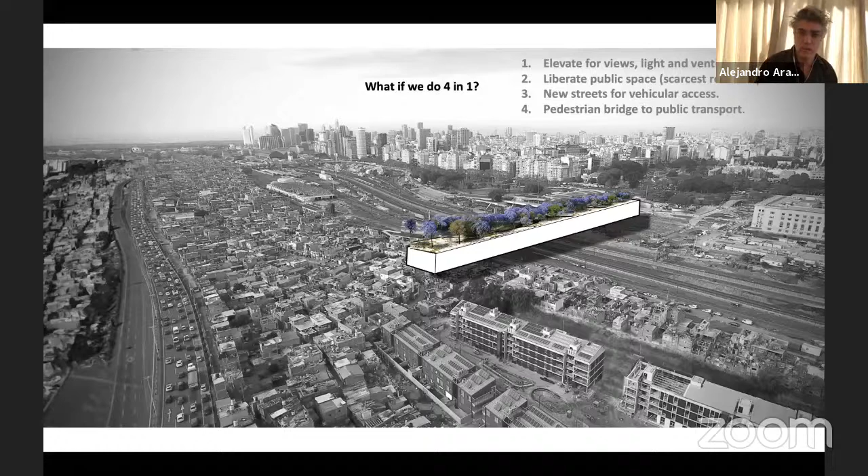So even though it was counterintuitive, they said we need weight. So we put a park on top of the bridge for the weight needed to lower the vibration, and it was improving—that was the scarcest quality-of-life element that the slum was missing. As you see here, the escalators on both ends also had the structural capacity to stabilize the building; inside is mainly a big truss within which the bank was expected to work.

And the interesting thing, while measuring value here—this is how we used the bank's own method of measuring value—in the current situation, within one hour of walking, this is the amount of opportunities for health, education, and cultural recreation people have access to, mainly around 300,000 jobs. By building the bridge and creating this shortcut, within that same hour of walking, you multiply the available work offer by 4, health institutions by 10, and education sees similar numbers.

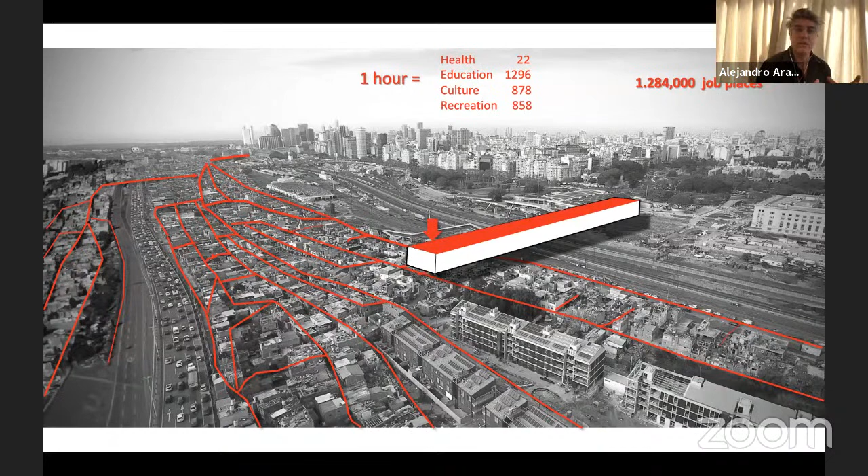And so these, in the end, I would say, are the kind of operations one may use to dismantle the social ticking time bomb, making opportunities available to cities—that's why people even came to the cities in the first place.

So it was not an easy sell for the board in Washington. This is how it looked at ground level. But given we have to be at plus 18 meters because of train clearance, it was an easier sell showing the view of the city. Once you frame that with the structure, the inhabited beam of the bridge, they relaxed, and there was a moment of relief in the board meeting in Washington.

But then, of course, the amount of development it was able to trigger—not only for the slum, but also for the formal city—this is a win-win situation for both ends of the social structure of society. And again, that same hour of walking is now not through infrastructure and waste, but through a park.

Luckily, we're coming from Chile, a very seismic country, and Argentina has no earthquakes—this finally worked in our benefit. And this is how we expected the building to look. One minor thing still had to be solved: we had to pass a new law in Congress to be able to use the air rights above the railroads.

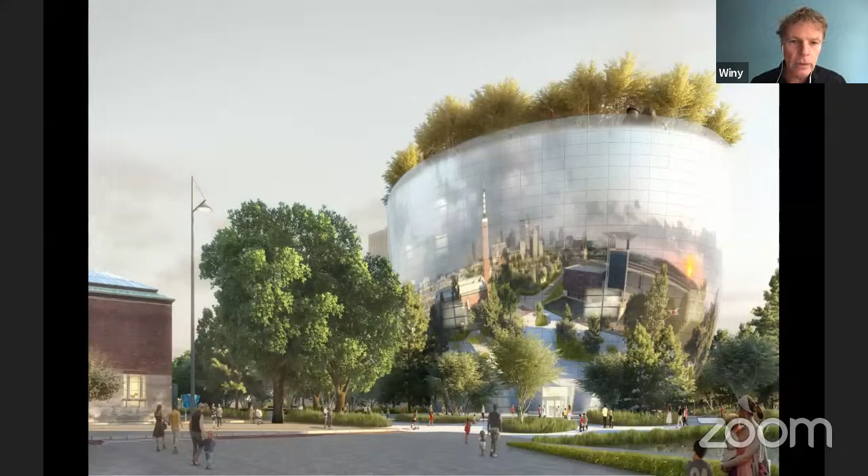This will coincide next year with a massive plantation of a forest that surrounds it, so that we can imagine a kind of resurrected forest in this mirage or mirroring environment that we try to create. That's this weekend. Tomorrow I will be here in Amsterdam, because I have to try to work on this CBD, which is quite an ugly element.

It resembles pieces of Buenos Aires indeed, and it is, but what to do with that. So we are given this volume. You know these rules: you make a plinth and some towers on top. The only thing we could do is basically erase the towers with a scripting tool.

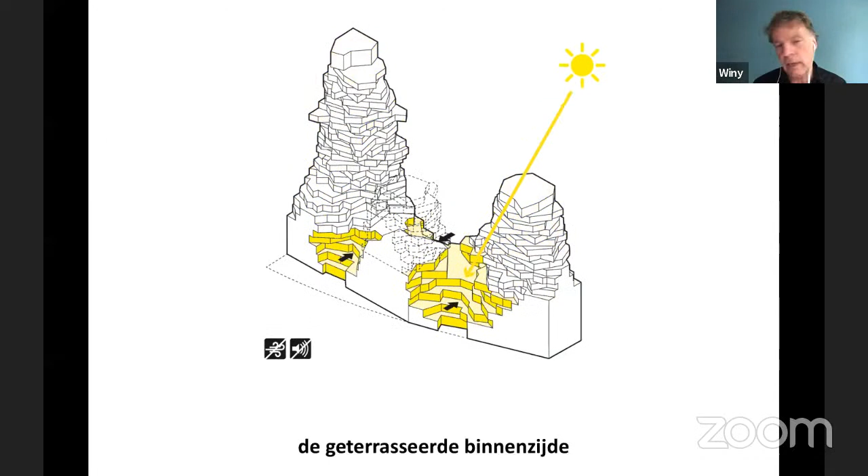So that we can make bay windows and cavities that allow for plantation, but also for stairs, that bring you, in the near future, from the bottom to the top, so that we can imagine this kind of green valley. Here you see a model of it, how we convinced the environment and the client to make that kind of breathing act, taking simply the architecture of the CBD but carving it away to give space for what I think is a green dip.

So some renders that help to show that, and how it can look to the soccer fields next door, turning it into a kind of stage set, under construction these days.

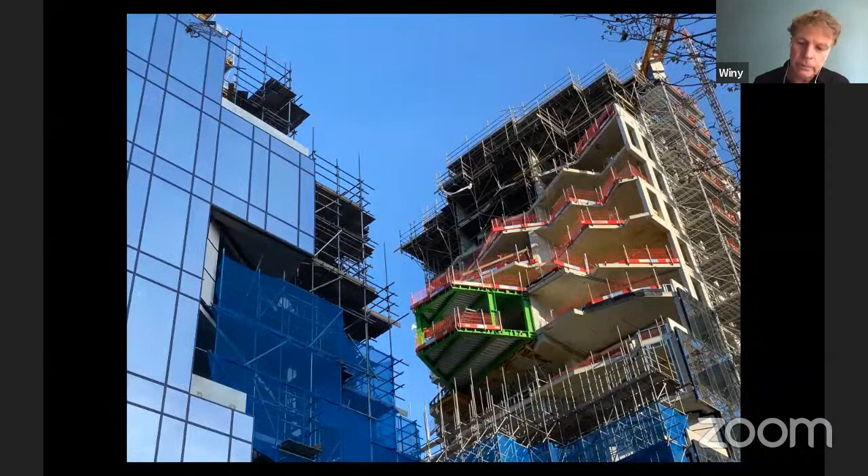This is currently happening now, and we can start to see how the stairs are coming up, how we can carve out the building and add things for any apartment and any function, as a mixed-use building that ultimately leads to this kind of proximity of people and plants and animals that are carved into this building.

So with the opening next year in February, and in September the final opening of the depot, this building will also be opened. And I do hope that COVID is over then, so that we can gather with each other on the stairs and on these roofs in the next episode.

I think Alejandro proposes that also, when you have a kind of city like this, with infrastructure that spans, you use that infrastructure to greenify the city and to connect out and reach out to the city. You have seen the pictures, but I want to end with what happens this week in this garden that has been made, where you can walk around.

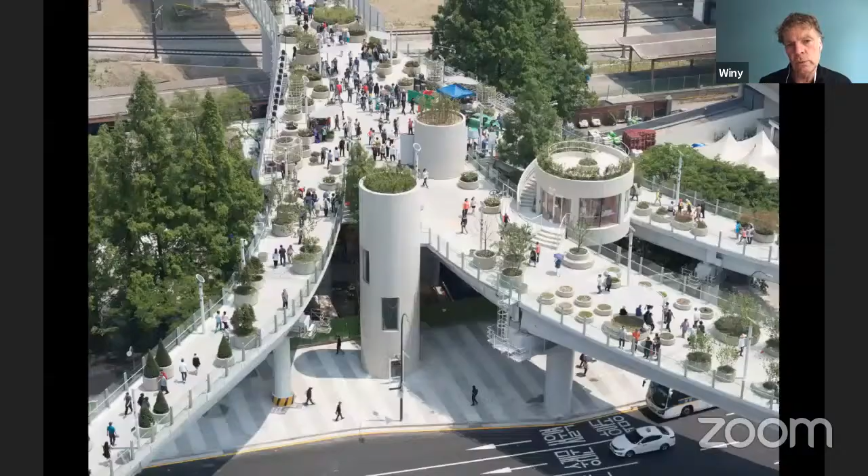It's actually an arboretum where all the species are tested, how they can grow in artificial circumstances, and how from A till Z - but in the Korean alphabet - you can walk around and find the test results of all these species in the heart of Seoul, and then spanning out.

What is nice, I think, is that the next step is now undertaken with a couple of competitions that will start: one for 10 streets that span out from this bridge into the neighborhoods, and secondly for 2 projects helping the Lotte warehouse and the conference center.

That lead hopefully to this extension the coming year, and then later in 2030 to this. And then I think we beat Seoul a little bit because of its image, and it starts to breathe more. I'm happy that also Tainan is somehow functioning, again, as a kind of laboratory.

In Taiwan they think it's a green city. Well, it's not - this is how it looks like. And we were tackled by the government to help for streets, but also to change certain buildings into a kind of lung of the city.

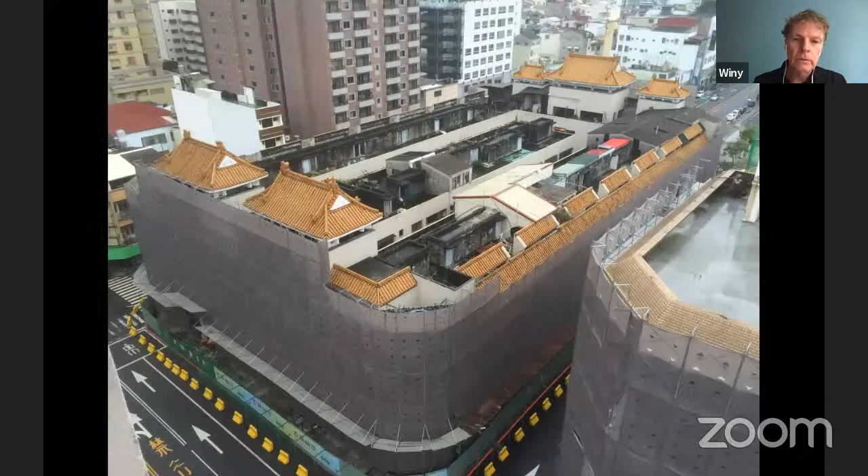This was the Chinese department store that we knocked down. Not all of it—we kept many pieces of the debris to keep the weight, because it's in the sea actually, and also to turn it in the end into a lagoon that would cool the city.

With the dream that you could swim in the ruins of the past is what it wants to be. So here you see the first tests before the opening, and we just opened it in February, so just before COVID-19.

But this is pictures from yesterday, how people are working on it and in it, how they swim in certain cases. And I want to show it also because we use the different levels in the water, not only for cooling this environment, but cooling also the city, but also to get a kind of dengue-proof appropriation.

So with the species that are there, some knowledge is now there how to deal in that way with dengue as a disease. And I know there are more of them, and Raoul, you showed it beautifully with all the malarias and cholera. I think we have to study what we can do on that in the coming time.

This leads us, as an introduction, to the Green Dip that we try to stage more in the Why Factory, a book that comes out soon, and that tries to investigate a little bit what is the effect of this kind of activities and to extend that to the future.

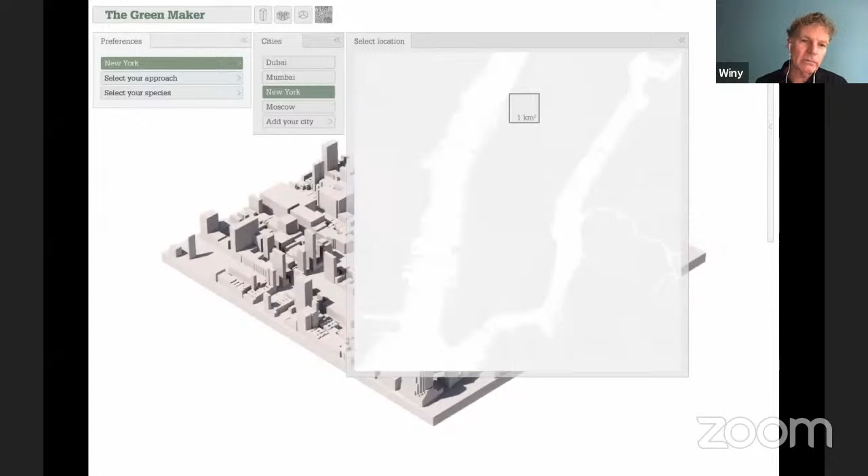We can do that with different technologies, deeper and flatter, and then we can apply it to any canvas I can imagine. So I opened one here, in this case New York. I like it quite a lot—it's a nice place.

What can we do if we select certain kinds of elements to cover the roofs? If we insert other elements to cover the facades, and cover the streets in between the taxis with other elements—how can we do that? Then you have a Manhattan which I would like much more, and that would actually produce cooling. It would be a cooler city, helping to generate some kind of contribution.

So it goes from, I would say, egoism in that way, which has dictated Manhattan, to a certain kind of we-goism. It gives responsibility to the city and adds something more than this kind of individualism that is there.

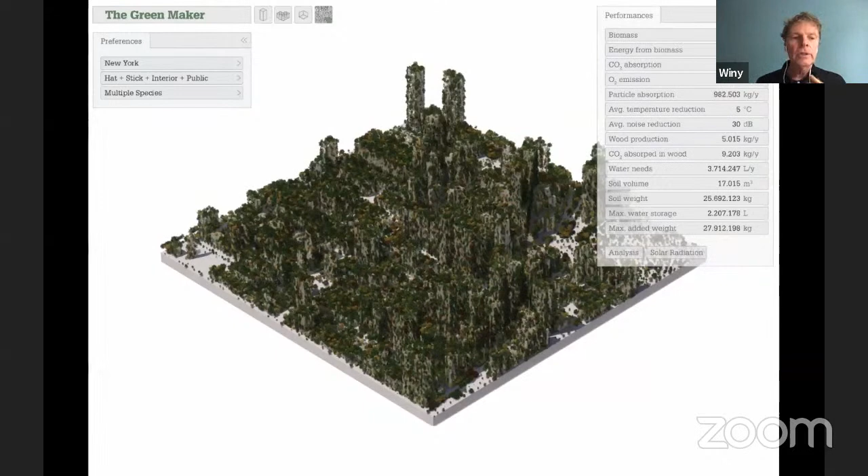So here, a small film of how it would look like. This is Fifth Avenue, better shopping I would say, and how the shops and apartments are contributing to it, not only in the exterior but also in pieces of the interior, and that can lead to this kind of green York. So after New York, the next York could imagine itself.

I really would like to invite New Yorkers to make this city and the next day a beauty and a reference, because New York is our reference in terms of urbanism. But Dubai can do it also. Here, a film of how I can imagine improving the hotels there with cactuses, turning it into a fantastic Fata Morgana in the desert, Dubai 2.0, creating clouds over the city.

And also, Rahul, this is for you, to dream about Mumbai, where of course we keep the water in many places, penetrating it with ficus benjaminas everywhere, so we can imagine a kind of new Mumbai at that moment. This is what this is celebrating.

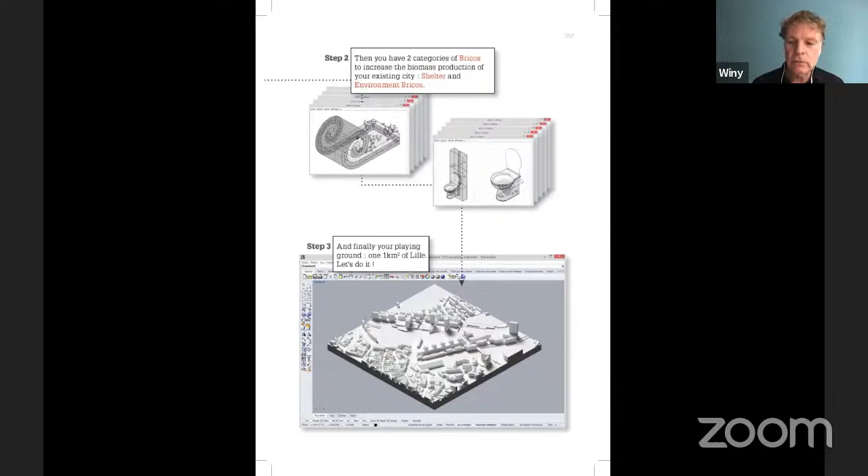If you program and parameterize that, analyze current environments, and put it on the canvases with new products, from skins to toilets, this kind of cohabitation could happen, so that natural enemies of dengue will also penetrate these environments, because I think we cannot get rid of all the diseases alone as human beings. We need the help of the environment to do that.

And then you see some kind of products now developed by the students, which lead to these kinds of coverages, beautiful walls where foxes can climb up, go over the roofs and meet their friends hiding in that way, and continue on the streets. Then I think cities become truly beautiful.

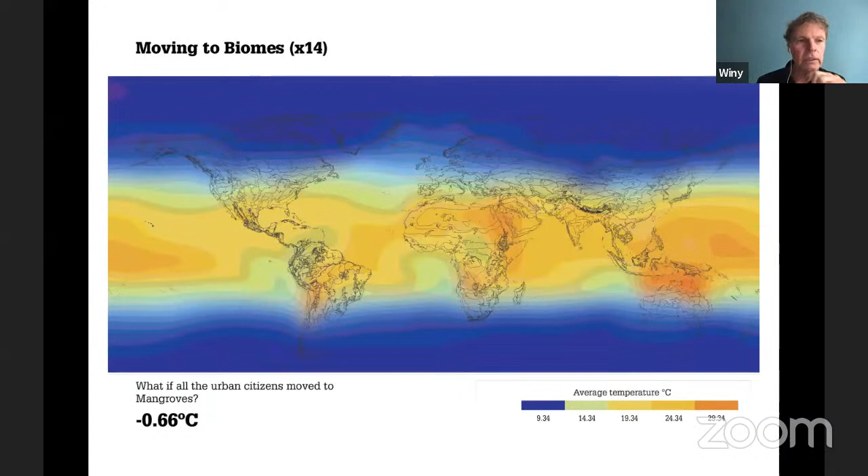And here, a modest North French city like Lille could become active in how it participates in this new kind of biology. As a result, if we did that all over the planet with any building, we would reduce carbon emissions insanely, and it would also help get rid of the temperature rise by 0.66 Celsius. We could imagine half of the operation being done by that activity. I know I'm far off, but I think it would help.

To end with, I think this is a technique that started, done by many of my colleagues, whom I love and adore. I only want to help them, to give it a stage set. If you look at the timeline and what can happen in the kind of biotechnology we are aiming at - and yes, the ETH is doing that too, Pascal, so we have to work together more closely - we move from concrete gradually into wood.

And then into bio-transformable material - I can start to imagine this is the Rotterdam section, and how in the coming 20 years it can move into this kind of transformable, adaptable, resilient environment, where I could answer the ephemeral question of Rahul by having a complete adaptable bio-city over time. And then Avatar would be cute compared to my future, transforming the city from a grey one into a green one, which cools the desert and stores the water of India in a massive sponge that we create together.